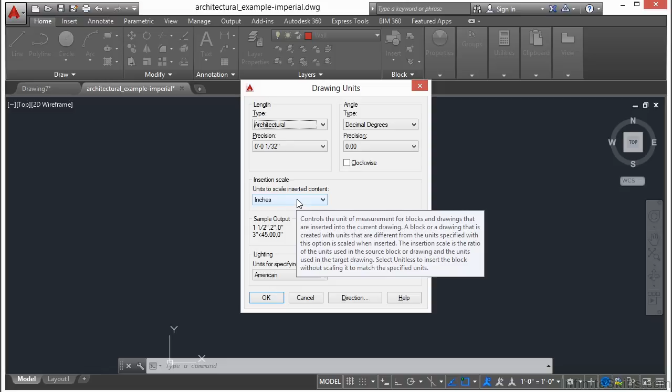Now if we open up in that same folder, the Civil Example Imperial, click Open. This is just a simple roadway here, a little pond, and a couple of residential lots with an area where a building is going to be at.

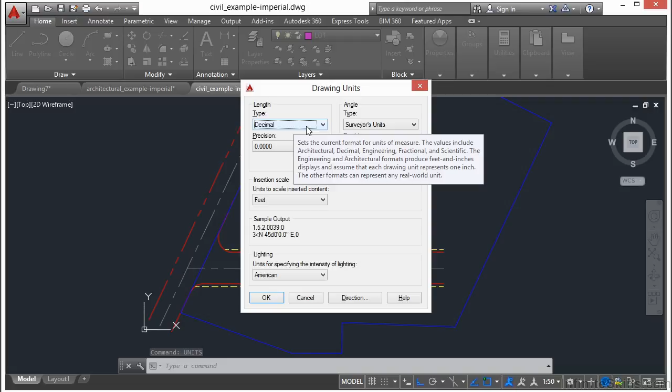Now, if we type in the word units, we see that this drawing is set up to be decimals of a feet. Precision is at 4 decimal places, and our units are set up to feet. So whenever we type in the number 1, we're drawing at 1 foot long. In our other drawing here, the architectural example drawing, when we type something 1 unit long, it's 1 inch long.

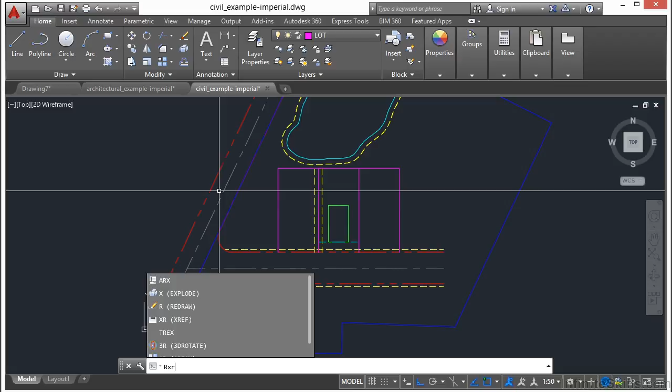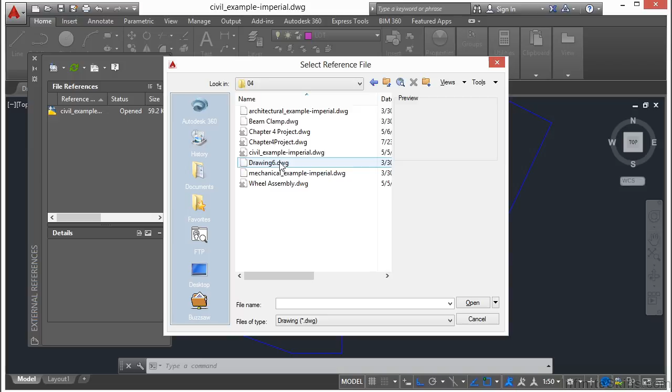So now if I want to reference this file in, type in XREF, this will open up my XREF manager. Now this will allow me to reference one file into another, and that's what I'm going to do here. I'm going to reference in my architectural example file. And here it is. I'm just going to insert it right there.

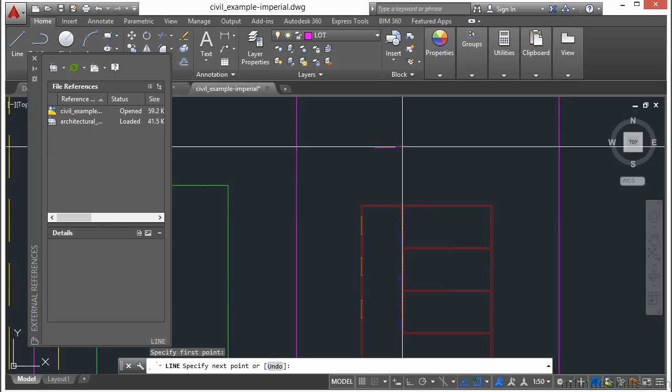So now you see my drawing right here of my building. And because I have my units set up properly, I can put it on one of my lots. Now, AutoCAD knows that whenever I draw something 1 unit long here, as an example, I'm just going to draw a line, type in 1, and it is 1 unit long.

Now we see here that this item in comparison, this is 1 foot long. That looks about right. This wall is about 1/2 foot. So that line should be about twice as long as that wall is wide.

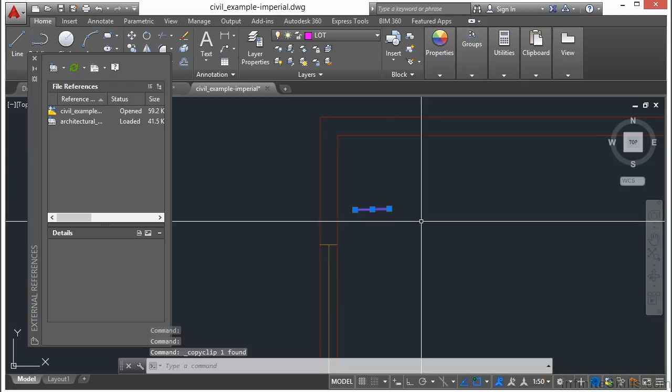If I select it here, press Control-C to copy that object, and I go back into my architectural drawing. Remember, I'm bringing in an object that's drawn into 1 unit, and it should be twice as long as this wall is wide. Control-V. It's not. We see it's much smaller. Very much smaller. Because in this drawing file, AutoCAD sees 1 unit as being 1 inch.

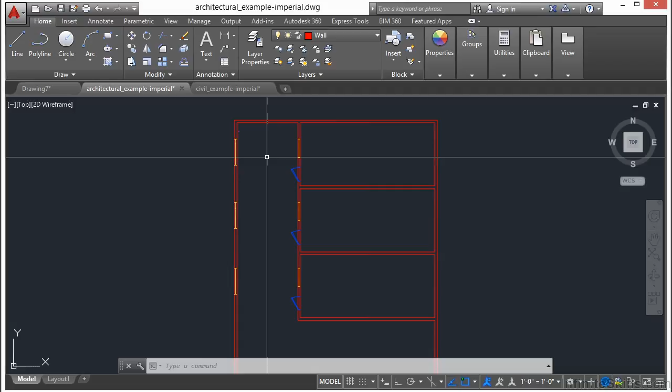So that kind of gives you an idea. But when I'm using the reference files, then AutoCAD says, hey, look, this drawing, my main drawing that I'm in, the civil example drawing, is drawn in at feet for units. And the file I referenced is drawn in as inches.

Oh, that's a scale factor of 12. I need to scale this for them so everything is drawn correctly in real world lengths and units. And so it knows that. Now that's great. So that's one important reason to make sure that you have your units set up.

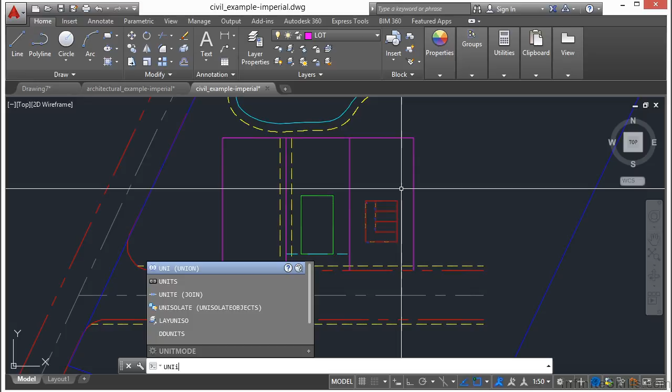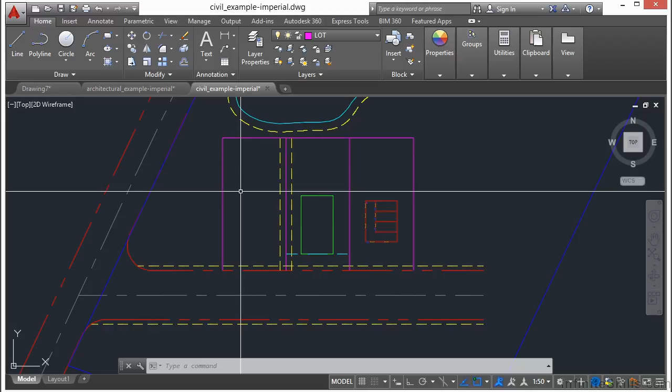Now, if I have these set up incorrectly, say that I set them to inches, click OK, and I try to reference this in, it's going to be 12 times too big. Now, this also works between feet, imperial units, and metric units, or vice versa. So it's great. So keep this in mind with this little demonstration here that your unit of measure in AutoCAD is relative, but it does matter, especially when you're working with other drawings defined with different units.